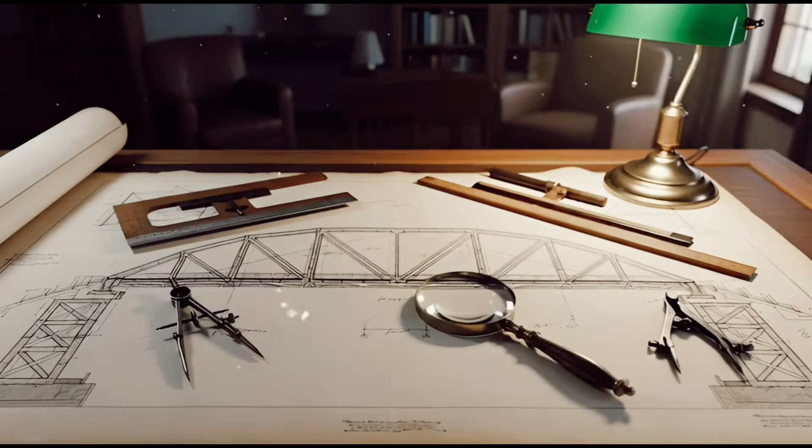Except, there is something wrong with this bridge. Look at the arch. Look at the curve of the stone. Look at where the weight is distributed across the span. Modern structural engineers who have seen this photograph don't talk about it the way you'd expect. They don't say it's impressive for its time. They say it should not be standing.

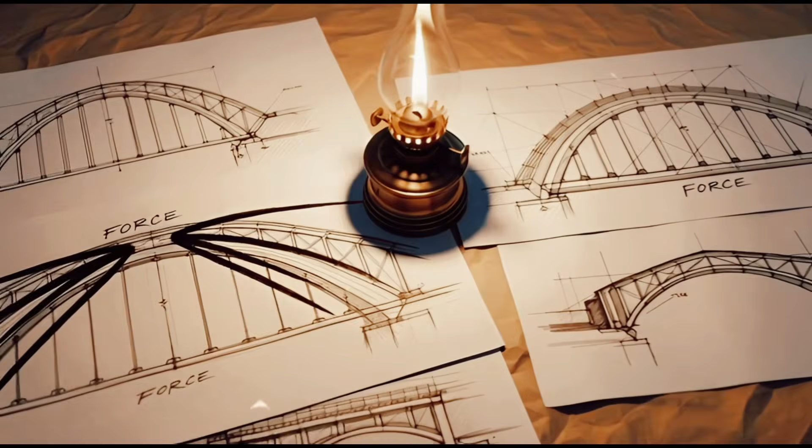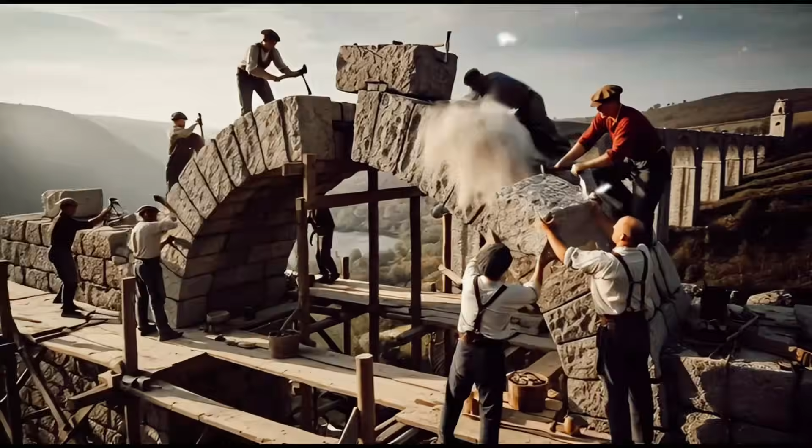Not because it is old, because the math we use today with computers, with simulation software, with 100 years of accumulated structural knowledge, the math says that arch is carrying loads it has no right to carry, that it should have failed a century ago. And yet, there it stands. So the question is not why it hasn't fallen. The question is, what did the people who built it know that we don't?

Old photographs are not just historical records. They are crime scenes. And when engineers look at them, really look, they find secrets buried in plain sight. Techniques that predate our understanding of them by centuries. Solutions to engineering problems we didn't even know were problems until we tried to replicate them with modern tools and failed. This is that story.

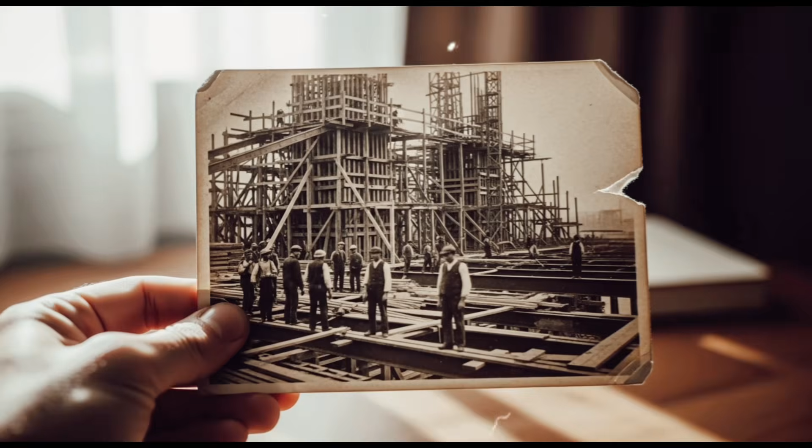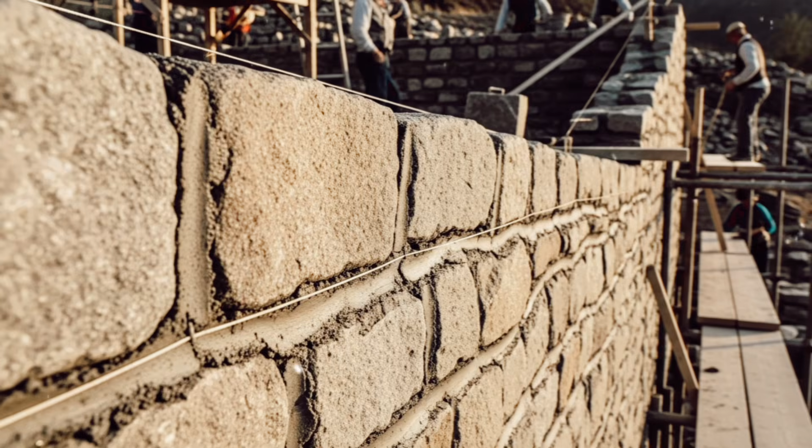Most people look at an old photograph and see the past. Engineers look at an old photograph and see a puzzle. Because every structure in every historical image is a data point. The angle of a wall, the spacing of stones, the depth of a foundation visible in the foreground of what was meant to be a portrait, the thickness of a timber beam caught accidentally in the corner of a construction scene. None of it was documented for engineers, all of it speaks directly to them.

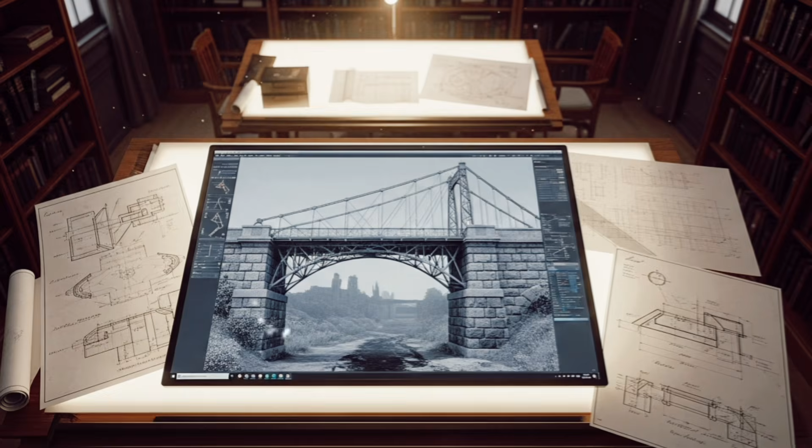In the last 20 years, a specialized discipline has emerged, forensic structural analysis of historical photography. Researchers at universities across Europe and North America have been systematically digitizing thousands of 19th century construction photographs, running them through photogrammetry software that extracts precise three-dimensional measurements from two-dimensional images, and comparing what they find against modern engineering standards. What they keep discovering is stopping them cold.

Again and again, structures that should be on the edge of failure or past it are not just standing, but performing flawlessly, often carrying loads far heavier than their original designers could have anticipated. Traffic that didn't exist when they were built, vibrations from vehicles that wouldn't be invented for decades, climate stresses from a warming atmosphere their builders never modeled. Somehow, they accounted for all of it. Not because they were lucky, because they were applying knowledge we are only now beginning to fully decode.

The Romans built arched aqueducts 2,000 years ago that are still standing. Not as ruins, as functioning structures. Some still carry water. The Pont du Gard in southern France is 160 feet tall, built entirely without mortar in its upper tiers, and it has not moved measurably in 2 millennia. For a long time, the explanation was simple. Romans overbuilt everything. They used so much stone, so much mass that the structure survived by sheer bulk.

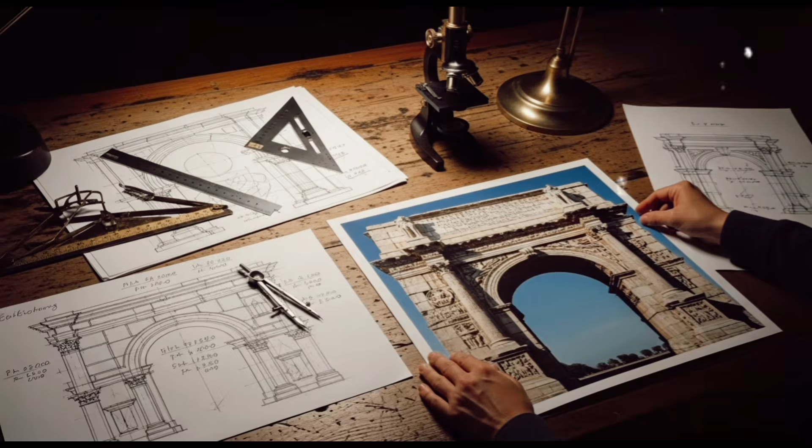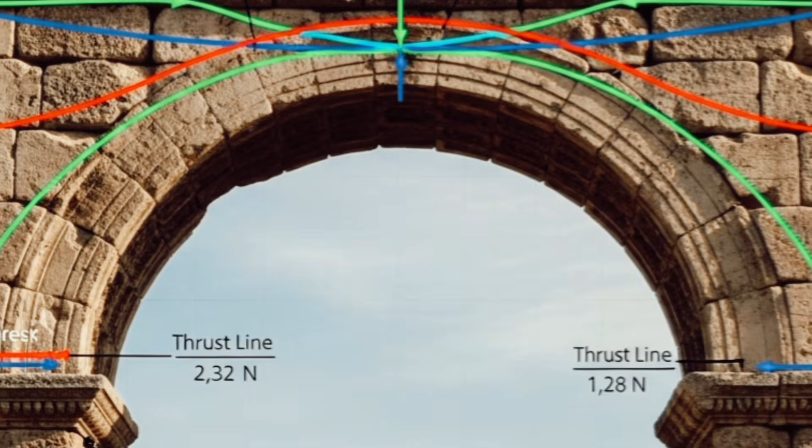Then, researchers started feeding photographs of Roman arch construction into modern load simulation software. And the overbuilding theory collapsed. What the software revealed was not brute force. It was extraordinary precision. The Romans had empirically discovered, through centuries of trial, catastrophic failure, and accumulated observation, a principle that structural engineers would not formally articulate until the 19th century.

The catenary curve, the precise mathematical shape that a hanging chain naturally forms under its own weight. Flip that curve upside down, and you have the ideal arch, the shape that converts every downward force into pure compression, pushing outward and downward through the stone rather than pulling it apart.

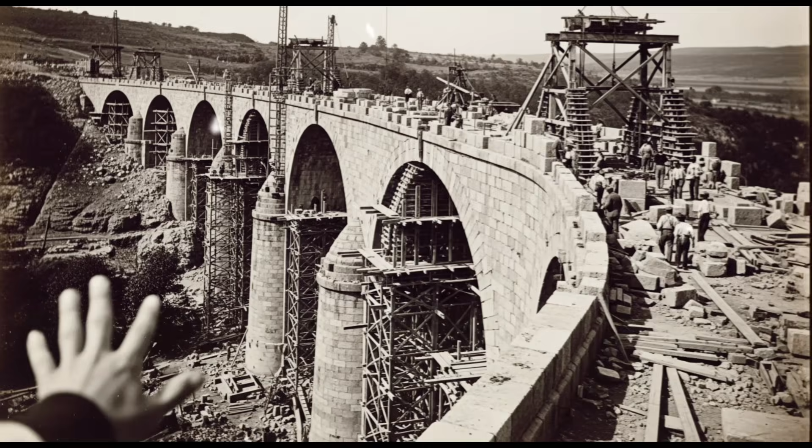The Romans did not know the equation. They did not have calculus. They did not have the language to describe what they were doing. They had eyes. They had generations of watching what worked and what didn't. And they carved that knowledge into stone so precisely that a computer running the numbers 17 centuries later comes back with the same answer. The photographs caught it.

Measurements taken from 19th century construction images, when Roman methods were still being actively imitated, show the same curve, again and again, passed down not through textbooks, but through the hands of masons who had learned from masons who had learned from masons, all the way back.

Here is a photograph from the construction of the Brooklyn Bridge, 1872. It shows the interior of a caisson, an enormous pressurized wooden chamber sunk to the riverbed so workers could dig foundations in the open air while the river pressed down above them.

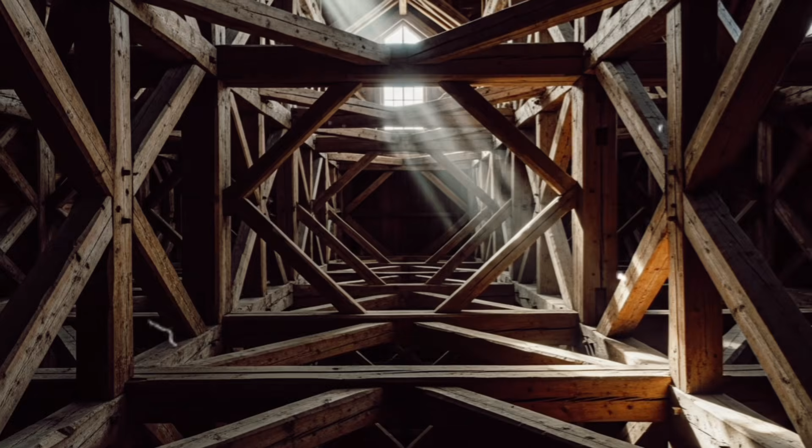What it also shows, if you look closely at the background, is the wall thickness of that caisson, and the angle of the support timbers inside it, and the approximate air pressure the workers were operating under, calculated from the depth of the excavation visible in the image. When modern engineers modeled those dimensions, they found something extraordinary.

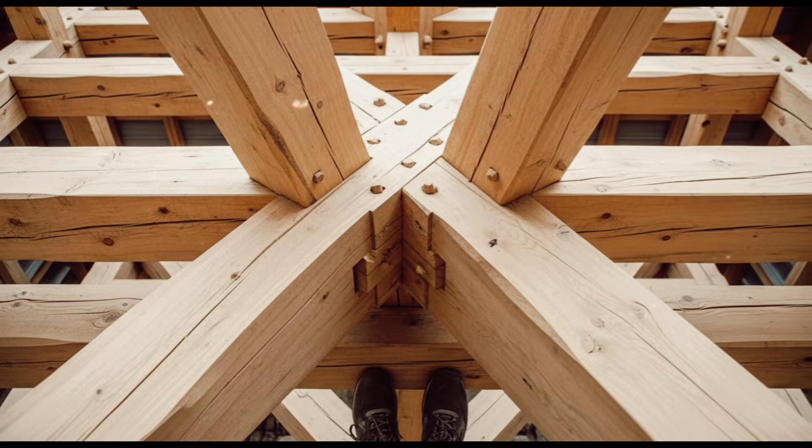The caissons were operating right at the absolute limit of what the wood could structurally handle, not over-engineered, not wasteful, but precision calculated to the edge of the material's capacity. The men who designed them, working with slide rules and hand calculations, had landed within a few percentage points of what the most sophisticated modern analysis would recommend. Without computers, without finite element analysis, without any of the tools we consider essential to modern structural engineering.

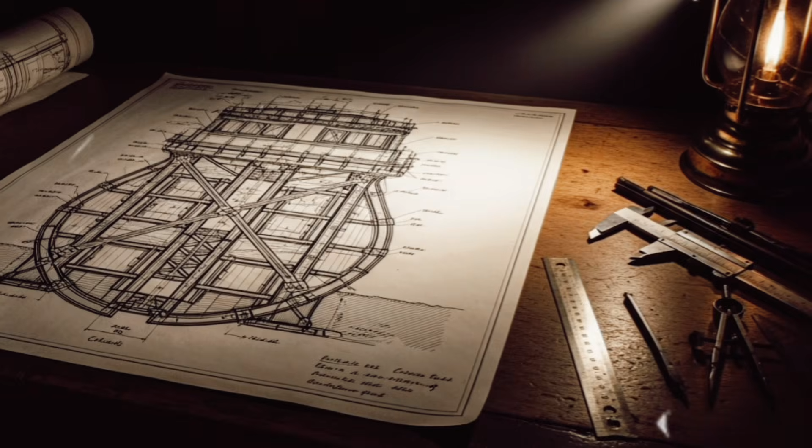How? Part of the answer is something engineers call embodied knowledge. Understanding that lives in the hands and eyes of experienced builders, not in textbooks. The lead engineer on the Brooklyn Bridge caissons, Washington Roebling, had spent years before the project studying foundation techniques in Europe. He had watched failures. He had measured what survived.

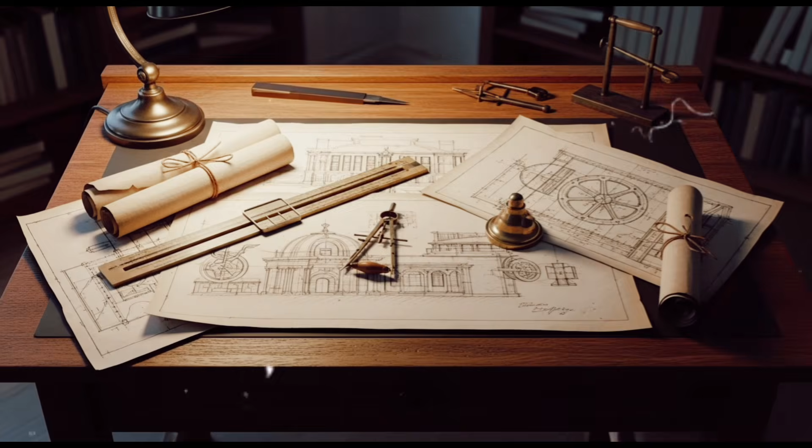He carried that library in his mind, and when the time came, he drew on it with a precision that modern simulation has repeatedly confirmed. The photographs are the evidence. The measurements don't lie. In the 1990s, a team of material scientists in Britain began analyzing samples taken from medieval

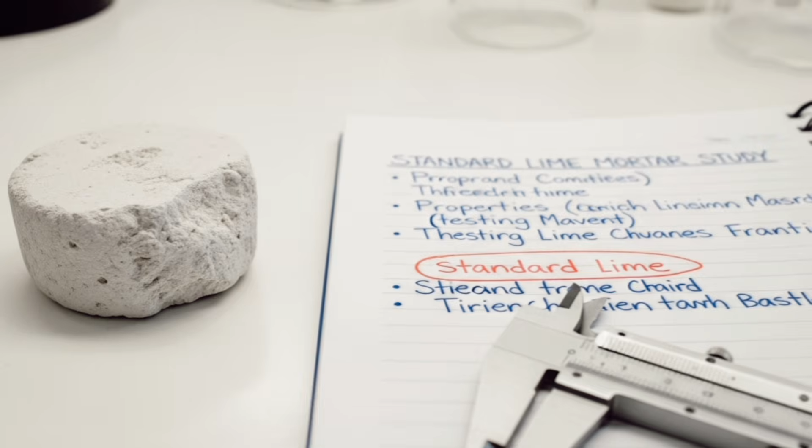cathedrals, specifically from the mortar used in their construction. What they expected to find was crude lime mortar, the standard material of the era, known for its relative weakness compared to modern cement. What they found instead was something that shouldn't have been possible.

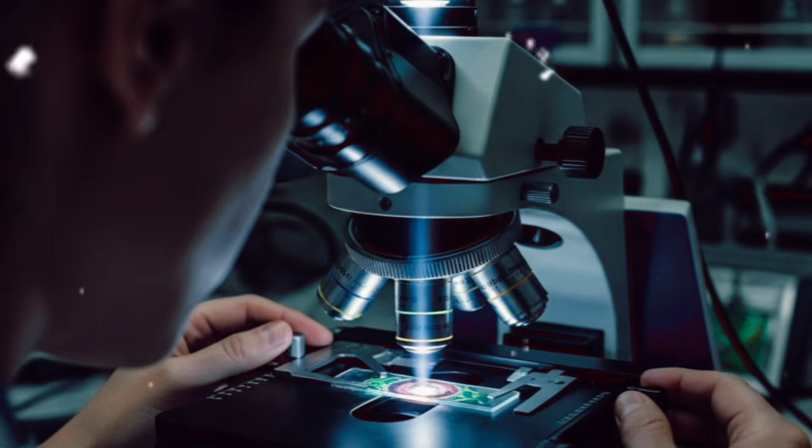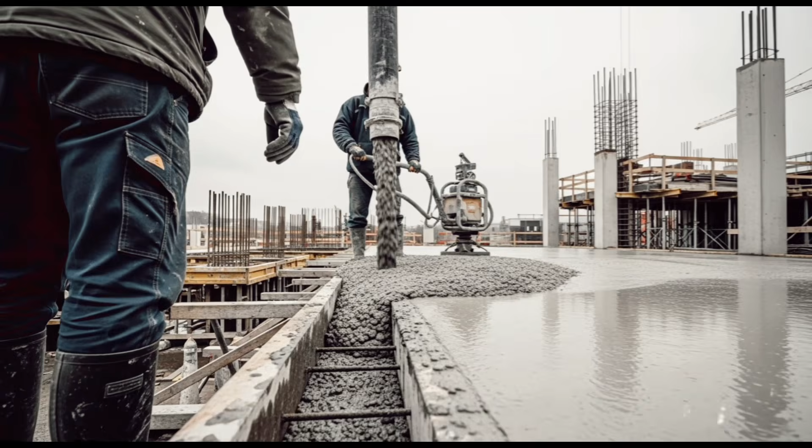The mortar in several of the oldest surviving cathedrals, structures approaching 9 centuries old, contained a microscopic crystalline structure that had continued developing strength for hundreds of years after the initial pour, not weakening over time the way modern cement does, getting stronger. The material was still actively binding, still growing denser, still increasing in compressive strength nearly a millennium after it was mixed and applied.

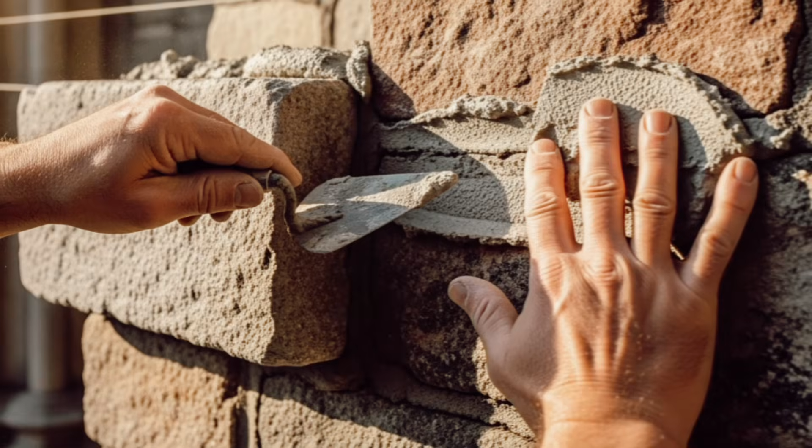Modern Portland cement, the foundation of virtually all contemporary construction, reaches its design strength in about 28 days. Then it begins a slow, irreversible decline. It carbonates, it cracks, it weakens. It is why modern concrete structures have design lifespans of 50 to 100 years, while medieval cathedrals, built from materially inferior ingredients by any standard modern metric, are still standing after 900.

The key ingredient, identified in part through analysis of construction photographs that showed the texture and consistency of freshly applied mortar, was volcanic ash. Specifically, a material called pozzolana, sourced from volcanic regions and mixed into the lime. The Romans had used it. Medieval builders inherited the knowledge, often without fully understanding why it worked. They knew it made the mortar better. They had seen it with their own eyes.

They kept using it. Modern researchers are now reverse engineering that formula, not to replicate it exactly, but to understand the principle that a material which continues to strengthen over time rather than decay is the most durable construction material ever used. And we lost the recipe for centuries. It was sitting in the walls the whole time. We just had to look.

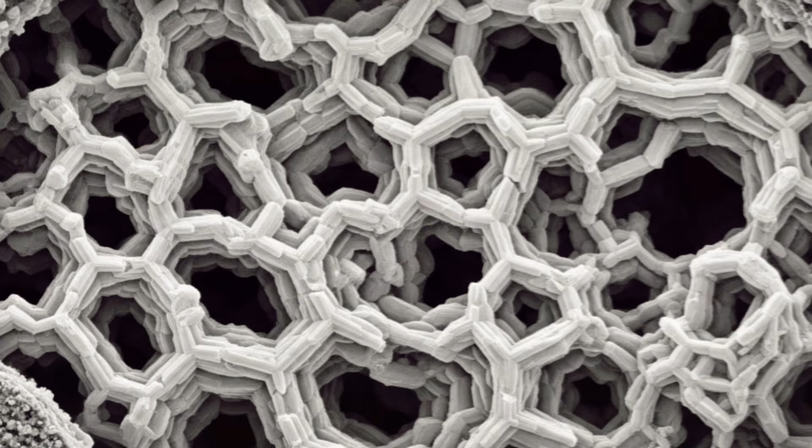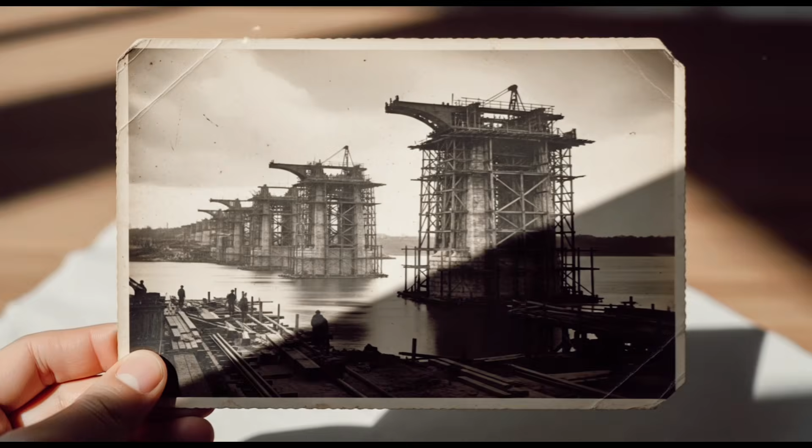There's a comfortable story we tell ourselves about progress. It goes like this. Knowledge moves in one direction, forward. Each generation inherits everything the previous one knew, adds to it, and hands something larger forward. The arrow points up. Always. Old photographs break that story. Because what they reveal over and over is that knowledge is fragile. It does not automatically transfer.

It lives in people, in practices, in traditions of doing and watching and adjusting. When those people die without passing it on, when a trade is disrupted, when a civilization collapses, when a material supply chain is cut off, the knowledge does not survive in books. It survives in the structures themselves, encoded in dimensions and curves and compositions that the people who built them could not have explained in words.

Every old bridge still standing is a message in a bottle. Every cathedral vault that has not moved in 800 years is a transmission from people who knew something, deeply and practically, that we are still working to decode. The photographs are how we read those messages.

A two-dimensional image, taken by someone who had no idea they were documenting a secret, processed a century later by software that extracts measurements accurate to the millimeter, analyzed by engineers who suddenly understand, for the first time, why something that should not work does. That is not history. That is archaeology of the mind.

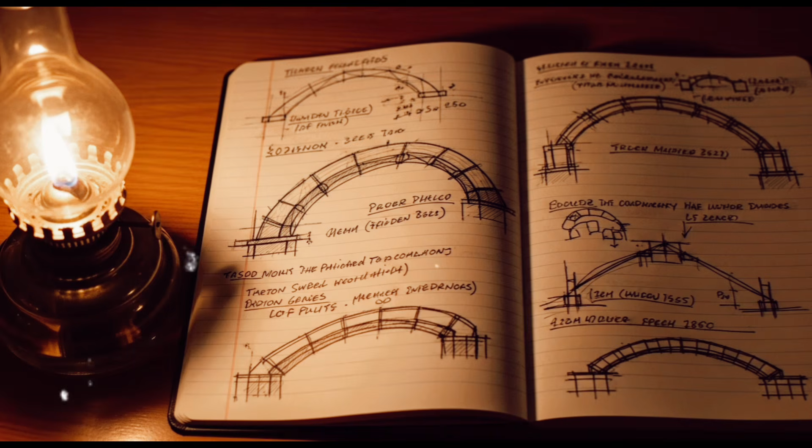Go find an old photograph, any old photograph of a building, a bridge, a wall, anything built by hand before the age of computers. Look at it differently now. The person who built what you are looking at did not have simulation software, did not have material science databases, did not have centuries of peer-reviewed structural research to draw on.

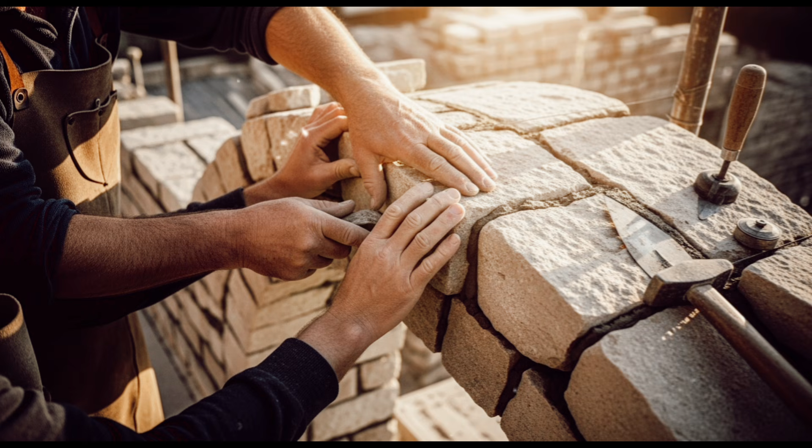What they had was observation, memory, the accumulated embodied knowledge of everyone who came before them, pressed into their hands through years of apprenticeship and practice. And what they built has outlasted the computers we now use to study it. We are not smarter than the people in old photographs.

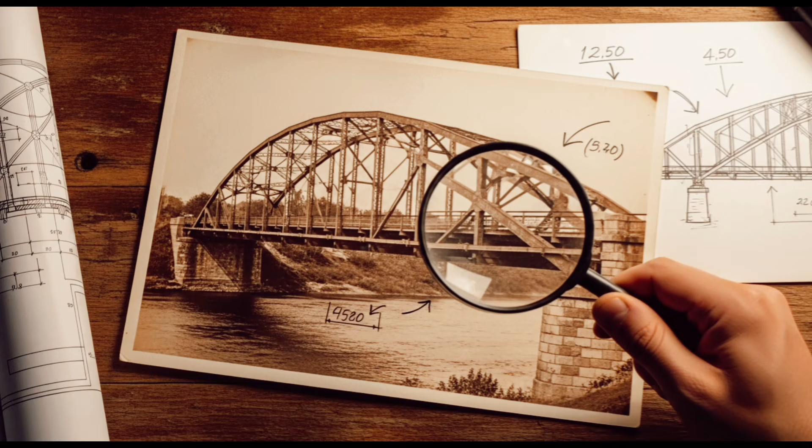We are differently equipped. And the things they knew, the deep, practical, experiential knowledge that lived in their bodies and not in any book, some of it we still have. Some of it we rediscovered, and some of it, if we are not careful, we will spend the next century finding again. In the cracks of bridges that are starting to fail, in the walls of modern buildings that are not aging the way their designers expected, in structures that last 50 years when their ancient predecessors lasted 500.

The secrets were never really hidden. We just stopped knowing where to look.